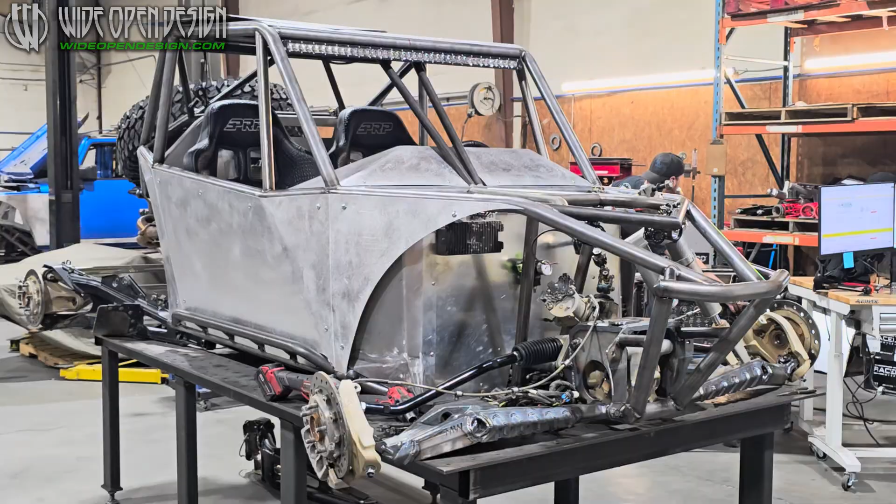There's more rock crawling. That right there is why Jason has poured the last 8 weekends of his life into this car to get ready to compete at the highest level of rock racing. Let's check out where he's at, let's see where he's headed. There's some really cool stuff going on today, so let's get to it.

Getting the front upper A arms done. Me and Adam had a discussion - these were supposed to have bushings on the end of them, and we felt like going to a Heim jointed setup to adjust camber and caster would be a great idea for this as a race car. So I redesigned the front part of the arm to accept the Heim joint out there in the end of it, and these are all getting rosette welded and double passed.

The ball joint cups, we redesigned these as well and made them thicker wall, just heavier duty, and they've already gotten double pass welded - it's got a real hot single pass, and then came back and did that trophy truck weave that everybody likes to see, and got it all burned in.

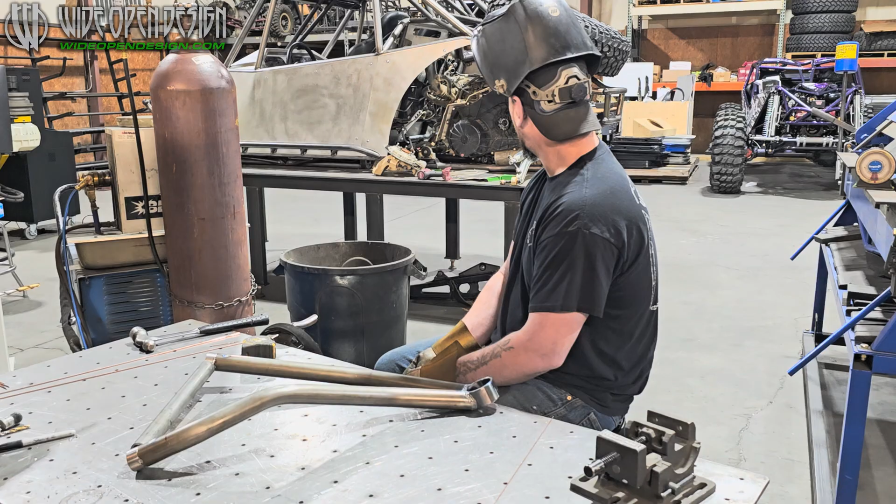I'll get this one finished up and burned, then I'm gonna jump on the plasma table and cut out all the rest of the front suspension mounting pieces, try to get those mocked up, throw the mock-up shock back in there, cycle the suspension, make sure everything's really good to go and kind of button that up. If we get through all that pretty quick today, we'll probably start working on the rear toolbox and stuff in the back of it.

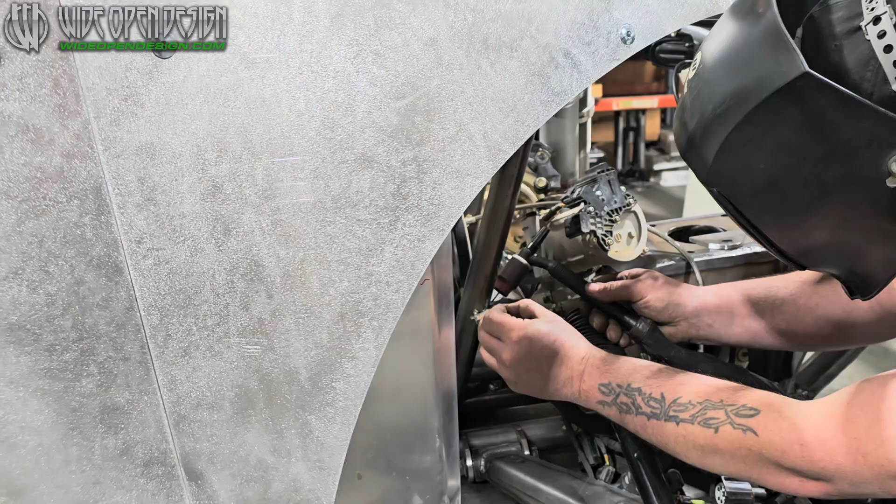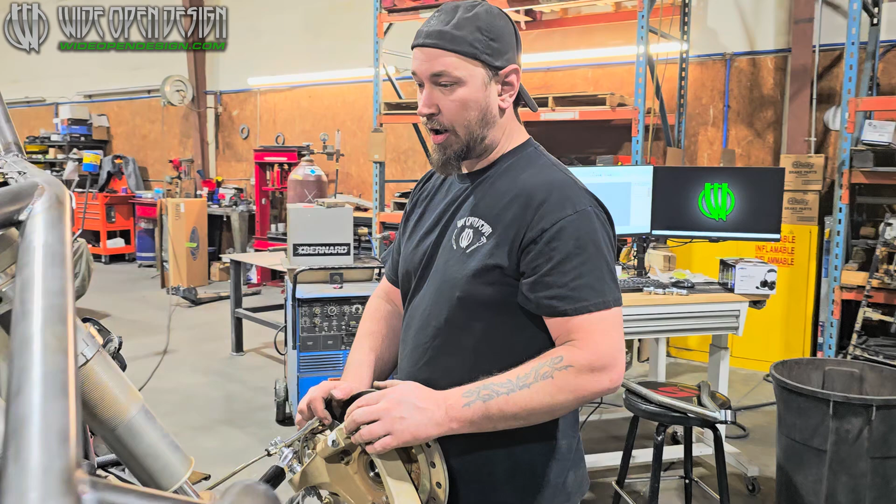This is all stuff we built. It's actually pretty unique because it's going to allow you to use any off-the-shelf turbo R parts. So anybody's suspension kit you want to run, whichever company you're a fan of, you can bolt all that stuff right back into the chassis.

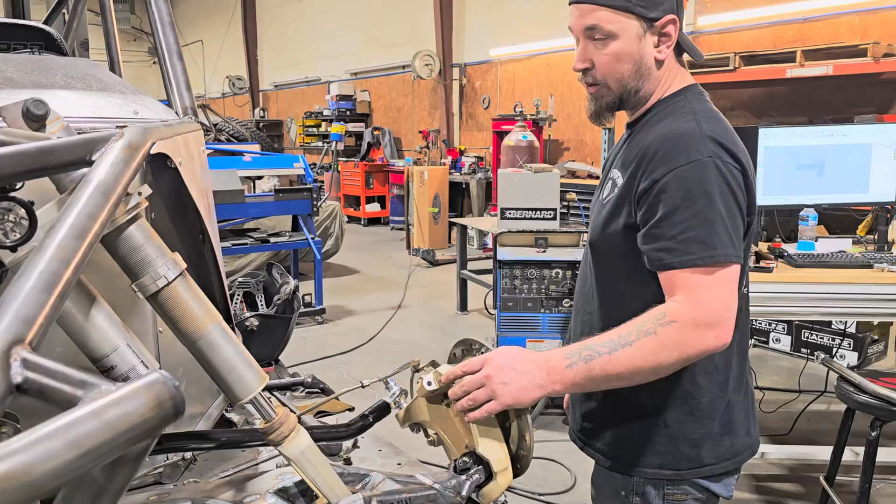RADFLO is building the replacement shocks for this to be able to go to market to sell to even full body users and race guys alike, and it's going to be a much, much better shock package than what you're seeing in this.

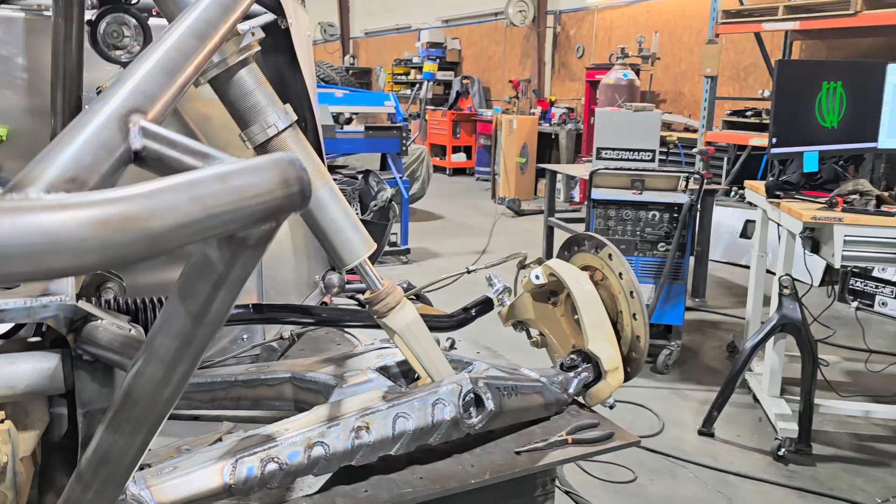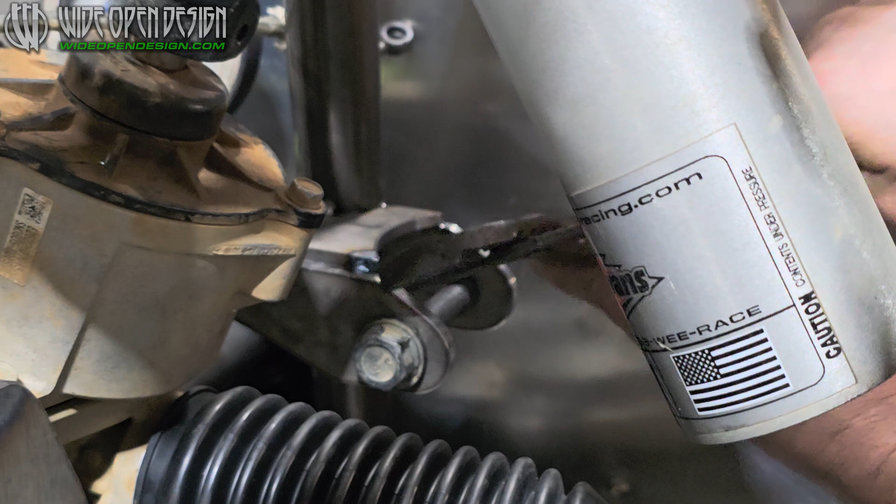Neat thing about a lot of this stuff is we spent a bunch of time CAD designing the whole car out to get it to where all this stuff could be cut with CNCs.

So you're tacking those in place and then adjusting them by just grabbing onto them and putting them where you want them. Yeah, I'm just making sure everything's nice and square, and I'm going to tack it all up, then I'll mock the actual arm in place and make sure everything still fits before it gets welded out. I want to make sure everything works and cycles and doesn't hit.

Like back in the day, you would have done all this with cardboard, cardboarding pieces out. I always look up to Shannon Campbell - what he gets done with cardboard is incredible. That guy just looks at things and figures them out.

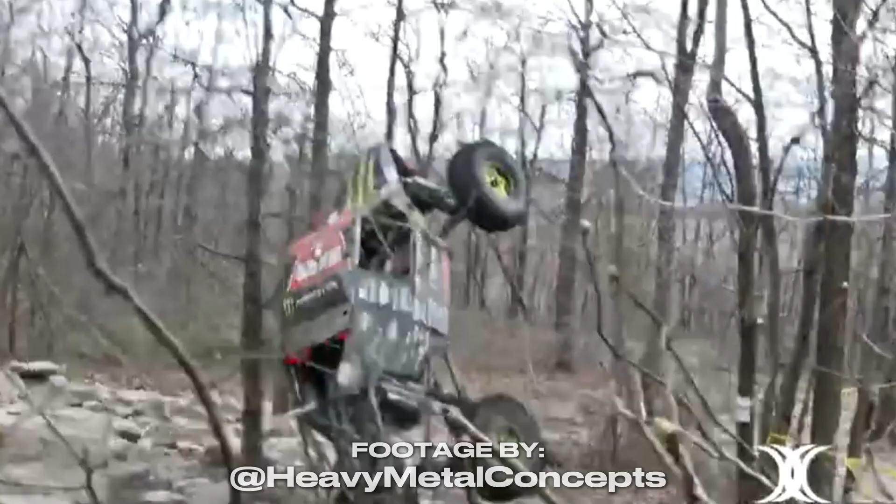The mix of that versus CAD designed parts - it would have taken 2 days to hand cut every one of these little pieces out for the front suspension and get them all cleaned up and fit in here. Instead, I spent a little bit of time on the computer and then walked over to the plasma table, and in less than an hour I've got every piece I need, and they all click and fit and go right where they need to go. It's that mixture of new school technology versus old school fabrication techniques that I think really just adds to the neatness of the car.

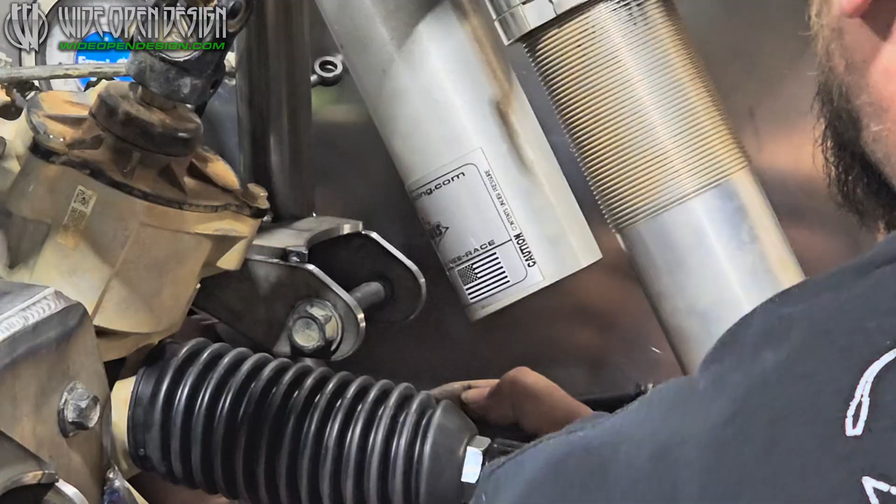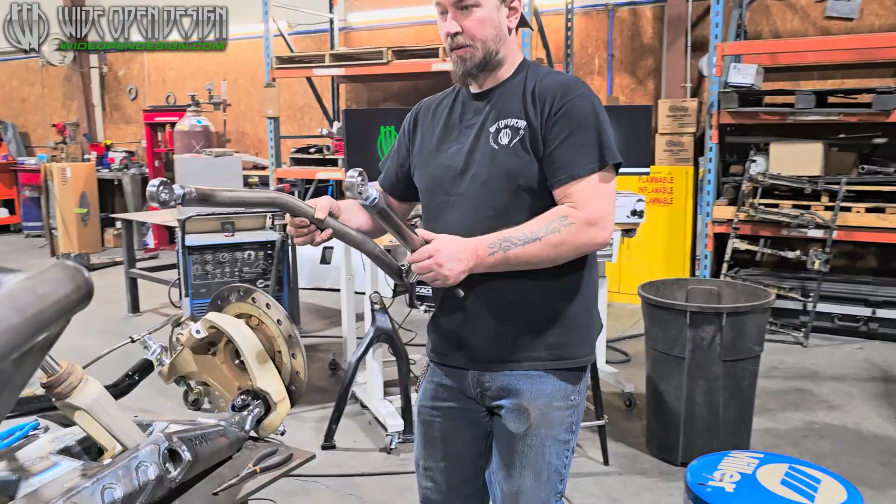Switching out, and we're not going to be using the custom bushings. We're going to have to make a couple misalignment spacers for this. I kind of know that going in, so for right now I just really want to see the arm in place. I'm going to be running RCV ball joints on this unit, which I'm really excited about.

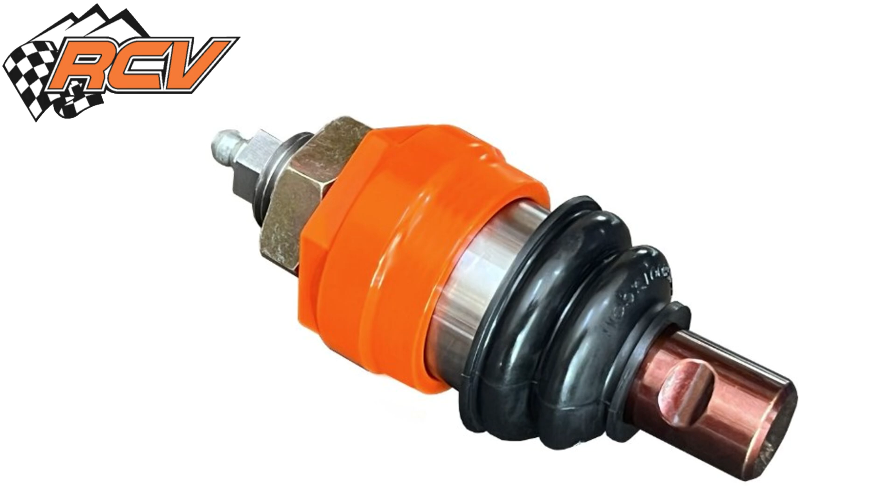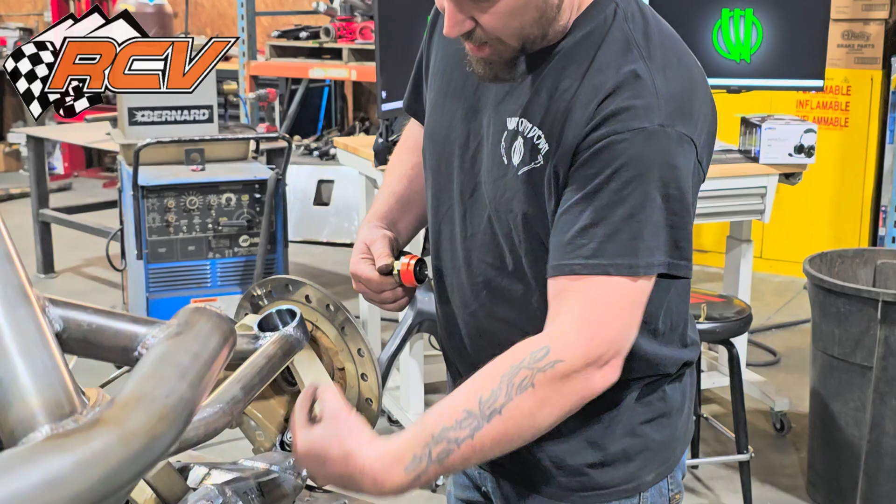Talked to Ricky quite a bit because they make these in 2 different styles. You can adjust preload in these, and then the lowers actually have a collar that you spin around, and it has 4 set screws that go in that are then retained by a snap ring. I think I've broken about every major manufacturer's brand of ball joint at this point.

I'm gonna have to clear this out. The welding process actually tightened that cup up a little bit.

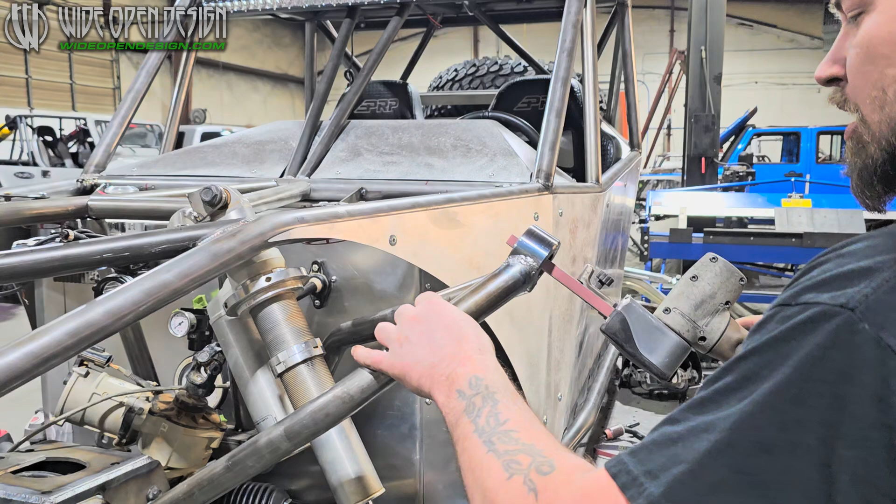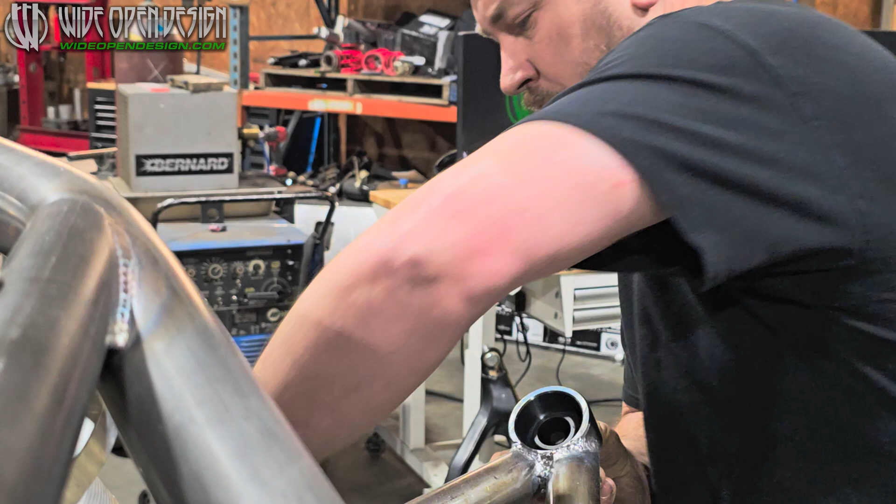Devin, our machinist, made these the other day, and he made them super tight fitting. They were machined to be a super tight fit, and then all the heat that I put in it welding this ball joint cup to the arm itself actually warped it just a little bit.

It's a good looking unit. A lot of good parts coming together on this car.

Both the heim joints are hidden, almost centered out real good right here. Once I get the misalignment spacers actually made, I'm gonna have to draw those up, and we'll probably run them out of our CNC machine.

I can actually get that squared up and call it done, but I can tell you everything looks good. Moving forward, I'm gonna come back in here, and I'm gonna end up putting a tube to brace this out right here. Might even plate the top of that in.

We're talking about trying to package an air bump out here. I'm waiting to hear back from RADFLO on whether they feel like the car is going to need it or not. Is that 188 wall? That's 120 wall. Strength wise, I feel like we're going to be all right, and it's on video now, so when I'm wrong, everybody will know it.

People have bungs get ripped out of tubes all the time, or they rip the ball joint cup actually off the A-arm. So I went back and I double pass welded all the ball joint cup in, and we increased the surface area on it.

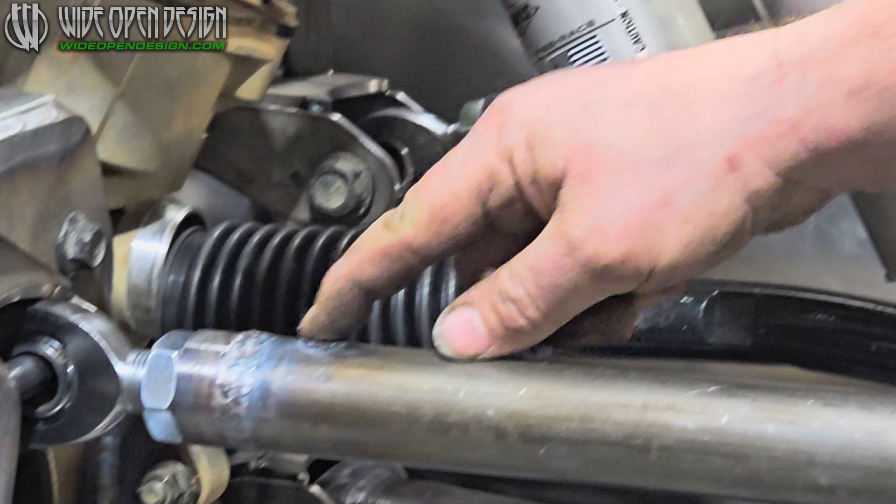And then I actually put a rosette weld in these bungs right here, so it has a rosette weld holding it in, and then that was actually triple passed. It had a fusion pass, a fill pass, and then a cover pass with that trophy truck weave look to it. So it should hold up.

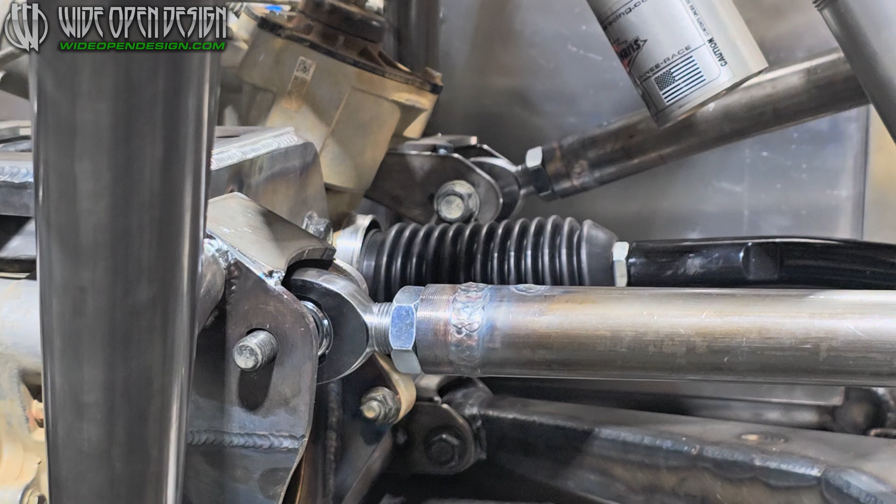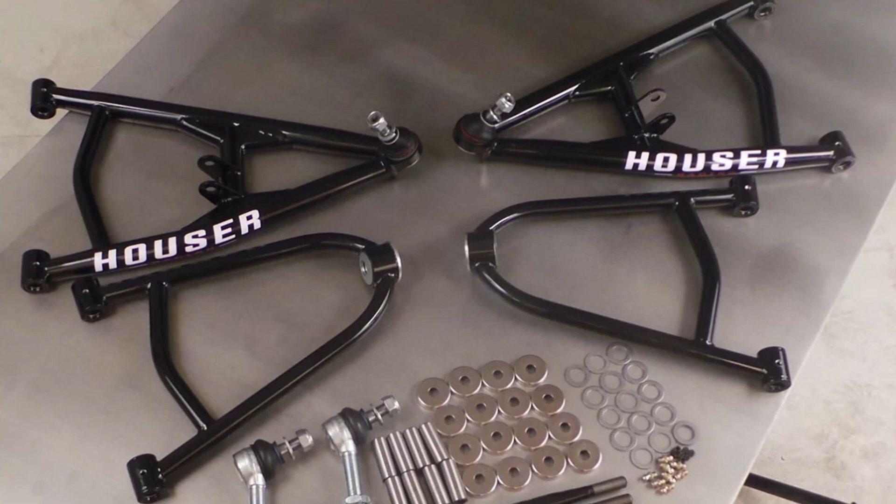I just had a wicked idea that I remember from back in the day. Houser Racing made these arms, they called them the silly cast. I think they might still make them, I don't know, I've been out of ATV racing for a long time, but they used a rod end, and then they used different spacers at the A-arm mount up in the top to adjust caster.

I think when we design the misalignment spacers for this, I'm going to make them narrow enough to where you could put spacers in between here and actually shift the arm forward and backward, and you can see what it's doing to the caster of the car. It's rolling the caster forward and backward while the arm's moving forward and backward.

And then I can use the rod ends that are in here to adjust camber, and that's going to give us the ability to set it up for desert. We can set it up for short course. We can set it up for woods racing.

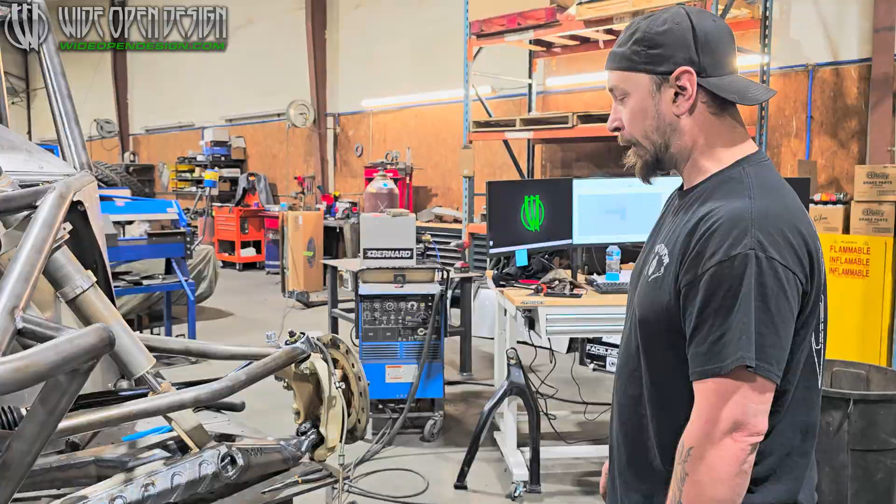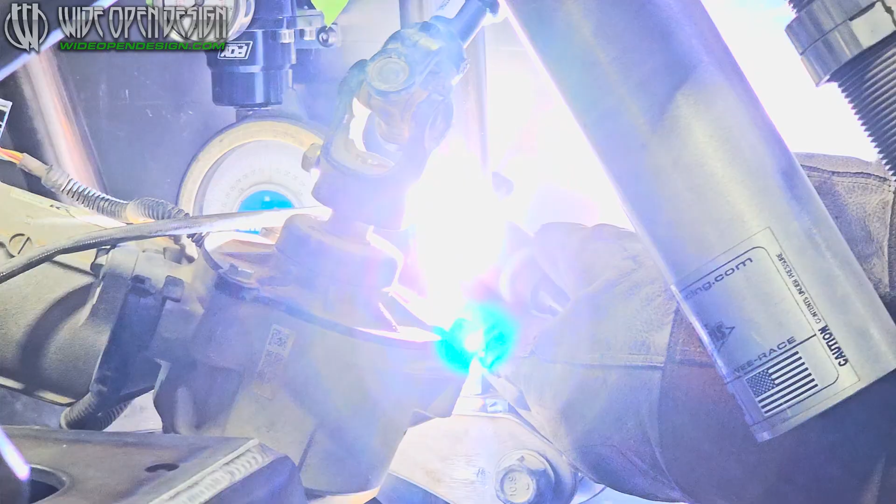Help spread load on that upper mount back there. Take a big hit like this way, it helps keep all that from trying to wad up.

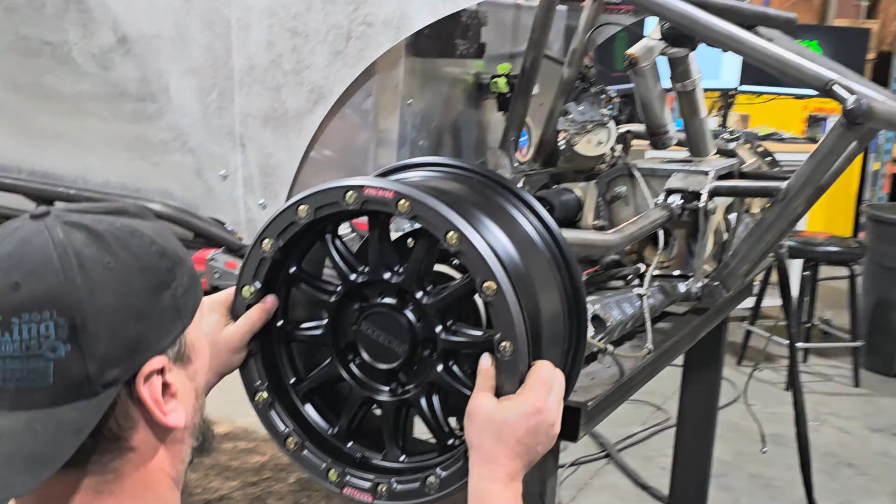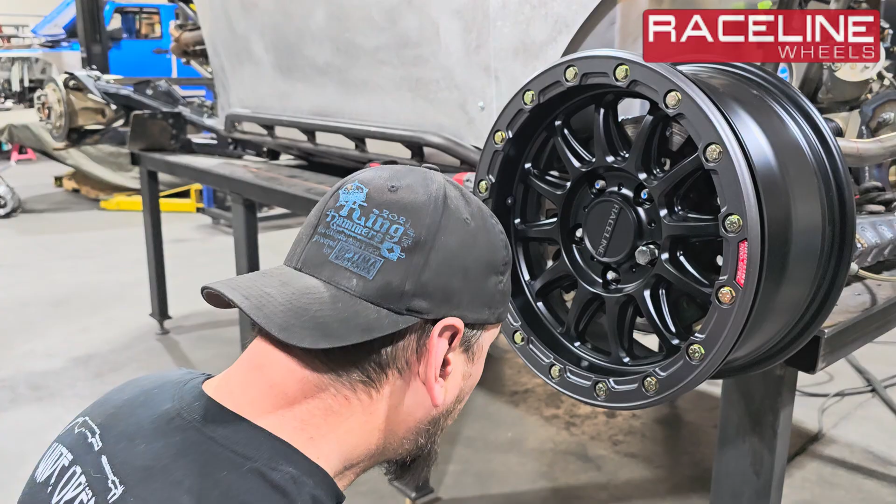Racelines are going sweet on there. We're leaving here in like 2 weeks, and you're behind the machine. What are you working on right now?

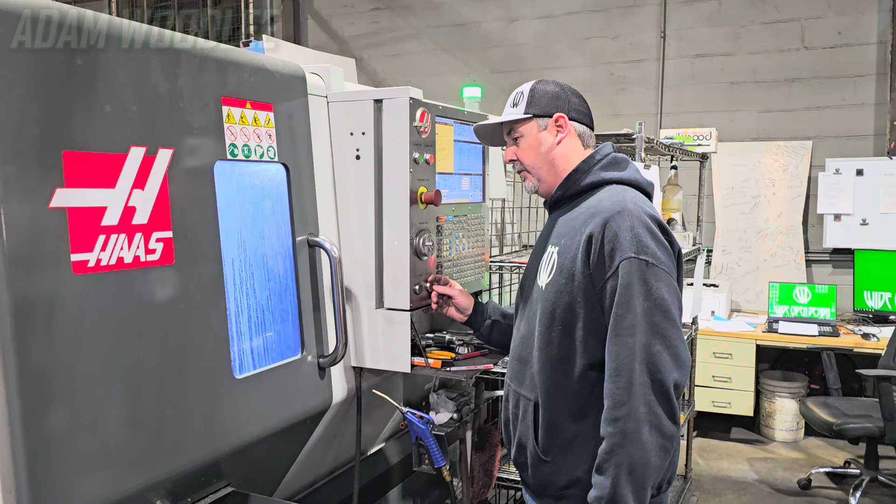Well, where Jason was talking about running those spacers in the front, we added a rod in there with no misalignment, so the chassis tab width's different than what it should be. So what we're doing is just whipping out a custom machine spacer that takes up that difference he was talking about. So I drew this spacer, just got the profile.

See this? So that fits right in there. And then we're actually going to machine another wide spacer that's about 3/4 of an inch wide, then an 1/8 inch wide spacer. That way, whenever we're moving this in the tab, we can set the caster of the vehicle, move the A-arm wherever we need to be.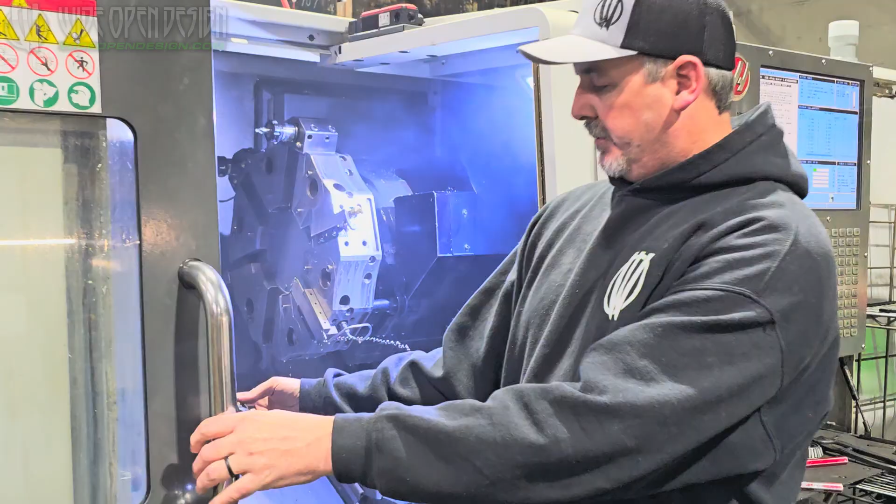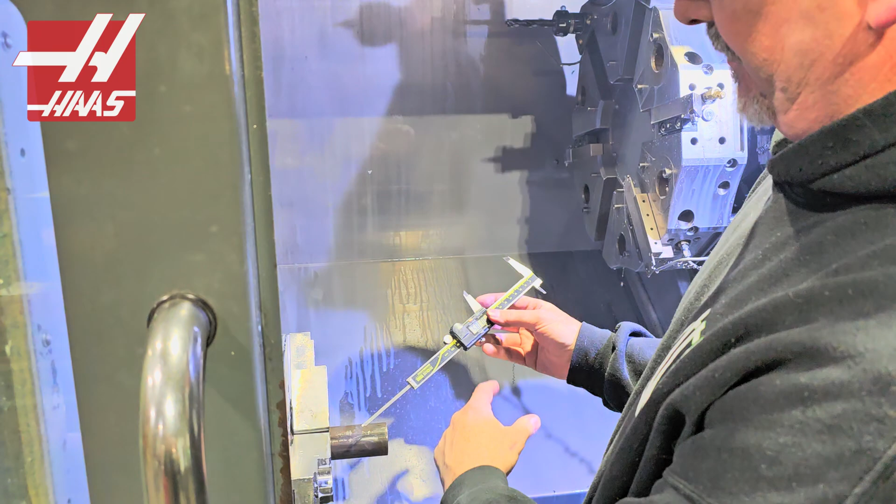Most of the time whenever I would do this, I'd set it up on a bar puller. This is just a quick op for us. I just kind of set my material in here by eyeballing with the calipers. I've got it locked down. It doesn't have to be real even because it's going to come in and face that material off anyways. So hit go, it does a tool change, and goes right to work.

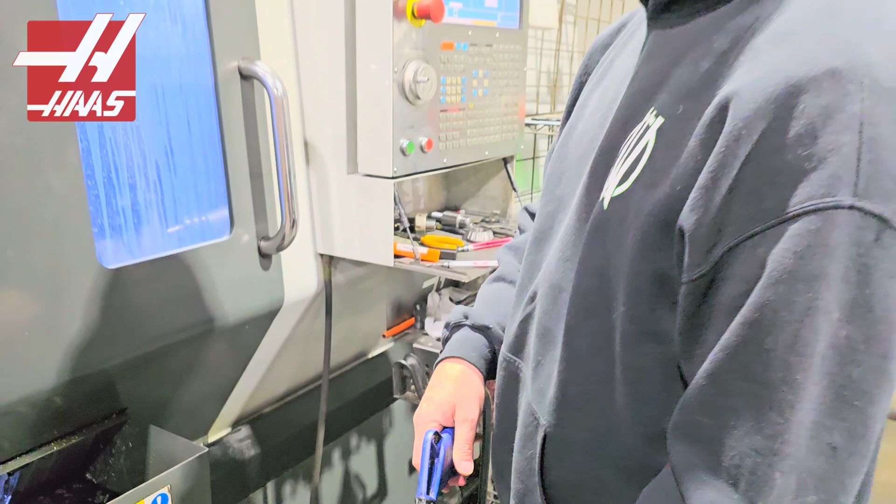Wait, so it pops the part out right here? Absolutely, when we're done. I did not even know that, I thought that was just a waste bucket. No, that's called a parts catcher.

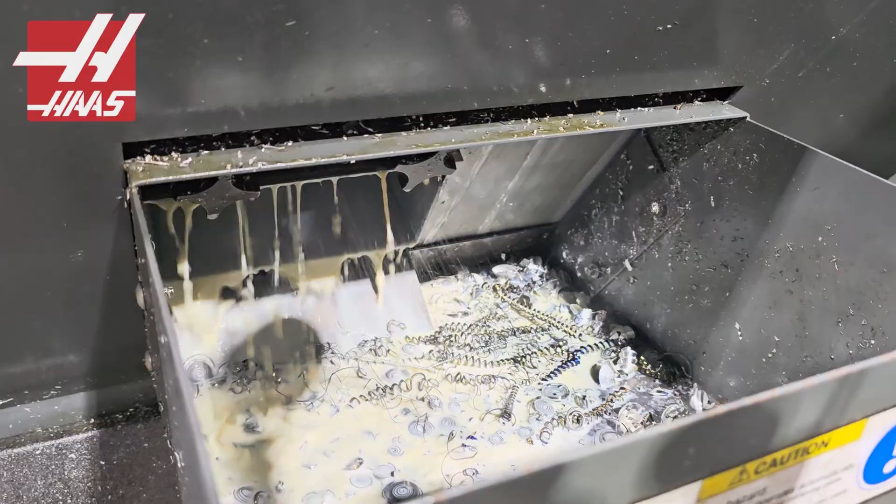No way. What? No way. So yeah, we get these all machined up. We'll go back to the car and check out what we're talking about with that adjustability.

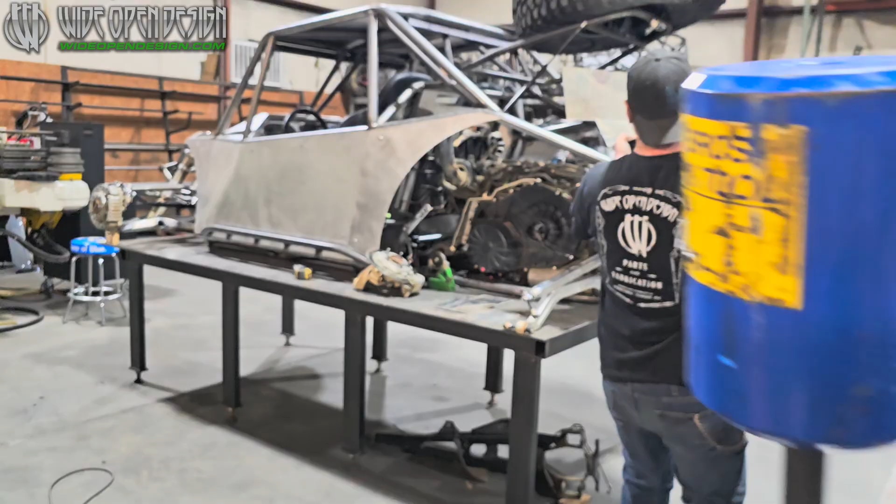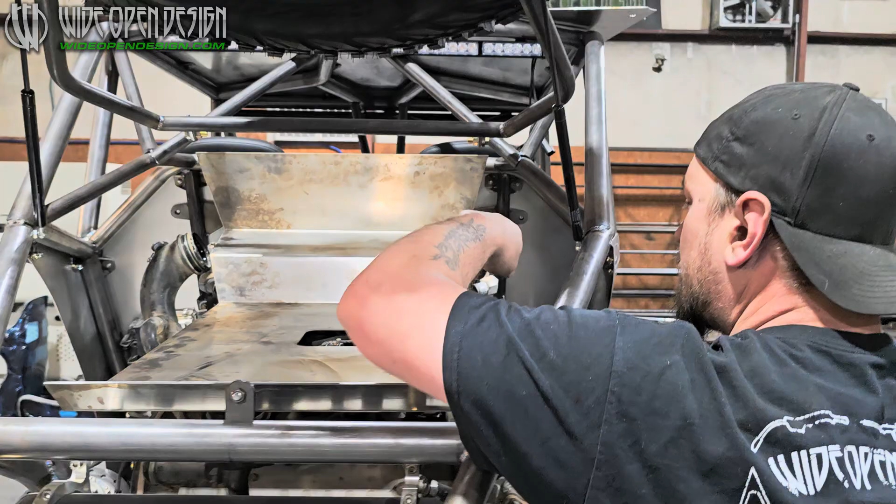Left a little access panel right there where you can actually change spark plugs and coils out without taking the box out. I wonder how you learned that. Yeah. I can tell you where we do have a problem is they've changed this over the years because this used to just plug in up here.

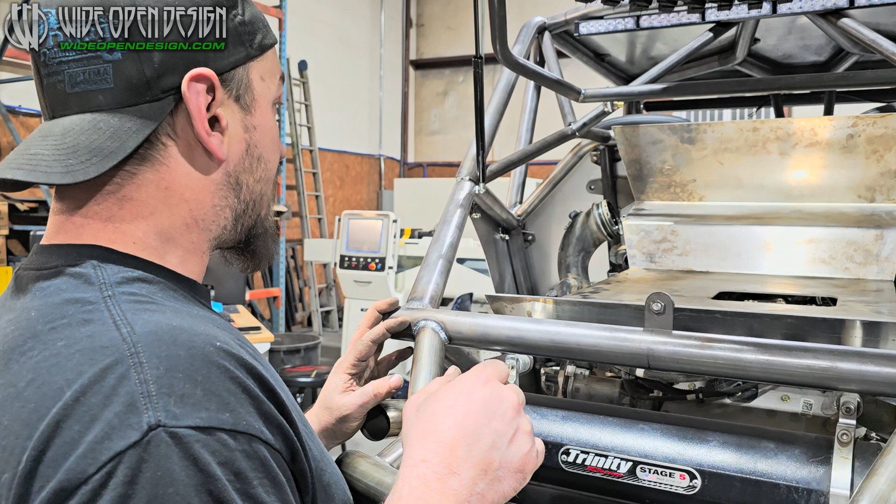So I'm going to have to order a couple elbows and either some stainless or some aluminum tubing and build a new intake piece that runs up around there. More money. More money. More aluminum money, intake, cooler sounds. Let's figure out how we can throw more money at this project.

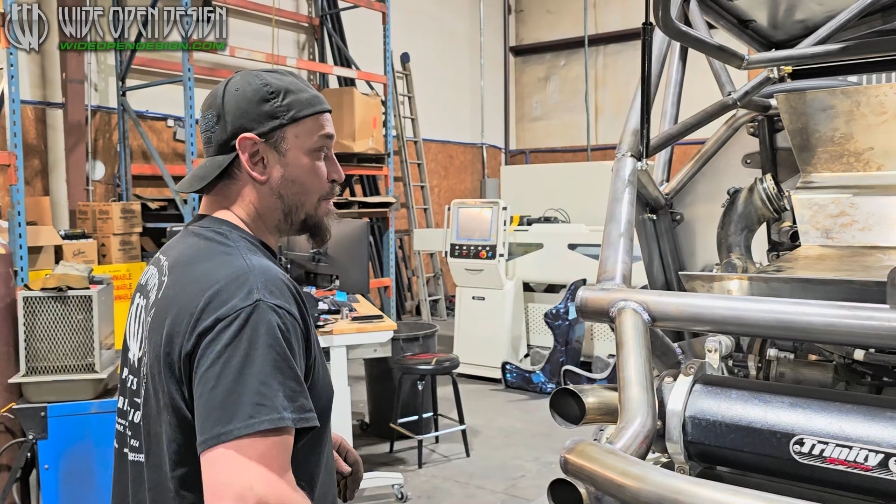That just happened right there. See that right there? More money. Seems to be the theme here.

Actually fits pretty good though. Throw a couple mount brackets back here to hold it and a mount bracket up here to hold it. Don't suggest anything to Jason because he's probably already thought of it. And what do you probably already think of? That is absolutely not what you need to do. When you have an idea or a suggestion, you need to come forth with it.

Come over here and check this out, Hunter. I'm going to show you a little something about how cool your idea is and tell me that you're actually on the right page with where you're going with your thoughts right now. So there's the tire carrier in the down position and the lid in the closed position, and if you click that, you'll see that the spare tire comes up and the lid comes up with the spare tire. It's pretty. That's clean. Pretty sick.

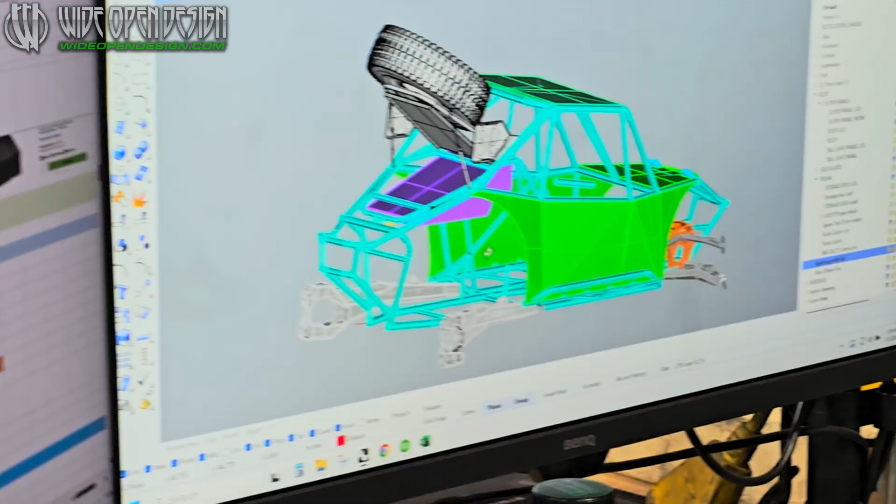Yeah, in CAD, that is a 37-inch tall tire. Makes it look small. It messes with you depending on what you got around it to give it perspective, but yeah.

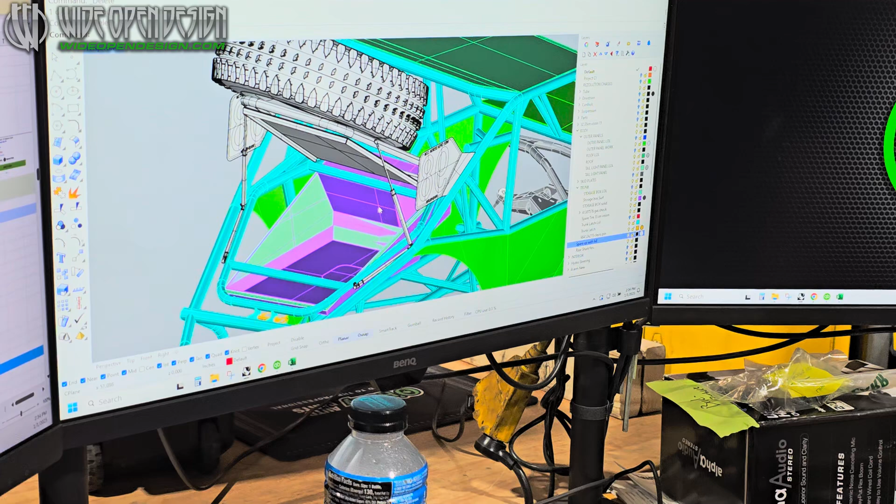So let's actually look at it. This toolbox consists of the bottom piece you just did, side pieces welded to it, obviously a back piece. If we delete this, you can see the inside where the air box is actually mounted up in the front right there, and the air filter rides in that part of the housing right there.

And then there's a lid right here that comes out, and this is so you have access to your spark plugs and coil packs in case you need to get in there quick. You don't have to remove the entire unit to get it out to access these. It'll be 6 bolts right here around this in a circle.

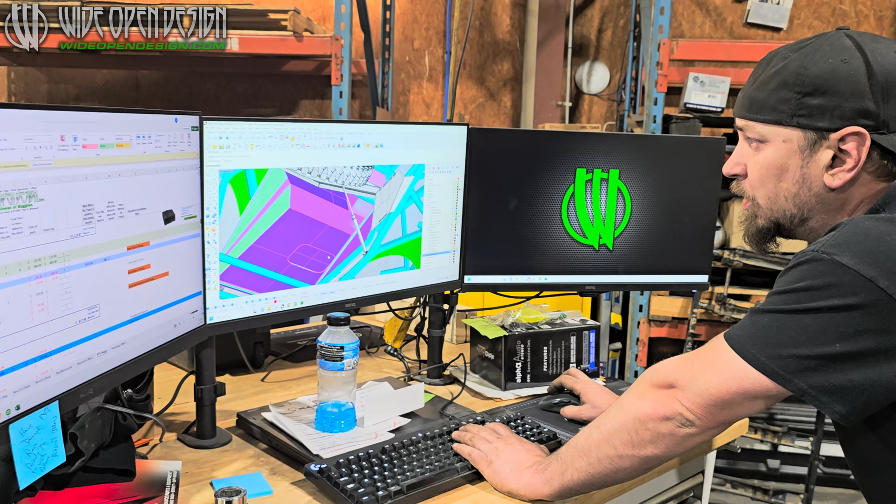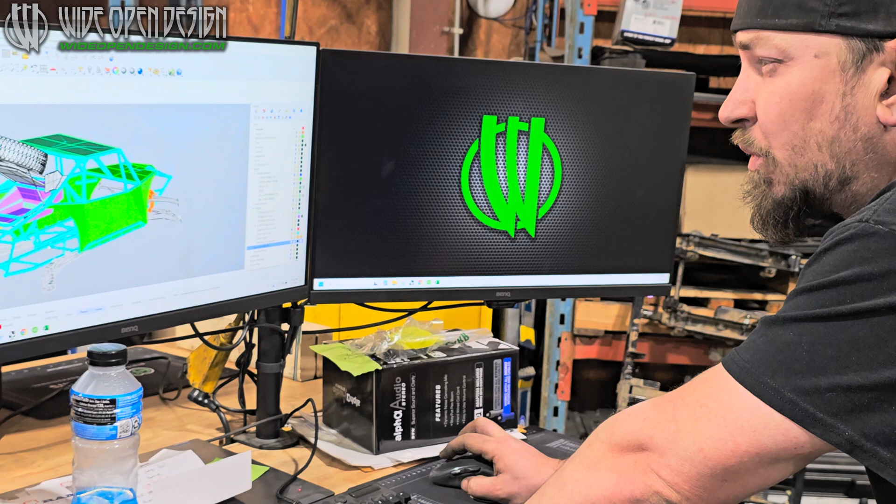And it's long enough to have spare space in here to where the RCV spares will be run right in here, that I highly doubt I'm gonna have to get out and actually use. That's awesome, plenty of room in here for tool bags and... When you engineered it like that, you wanted to carry some spare axle shafts, but you know the regular off-road guy is going to want to carry spare shafts, so that's kind of the thought process there.

Up here in the top, there's a piece not shown here that I've done on the last 2 or 3 of these I've built. I bend up a little piece of 125 that's really close to the thickness of the belt, and then you can stick a belt right in there and it hangs out the top of the spare tire lid.

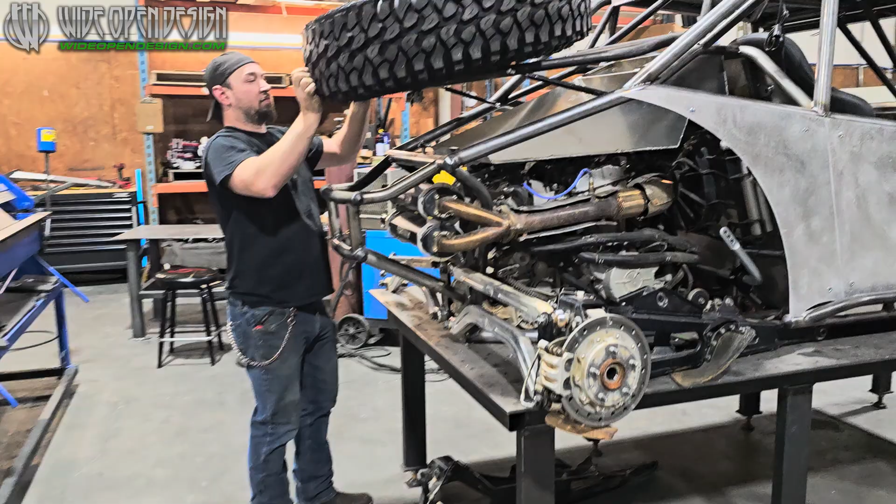What you got? Fine, I got a hoodie pocket full of stuff. Hoodie pocket full.

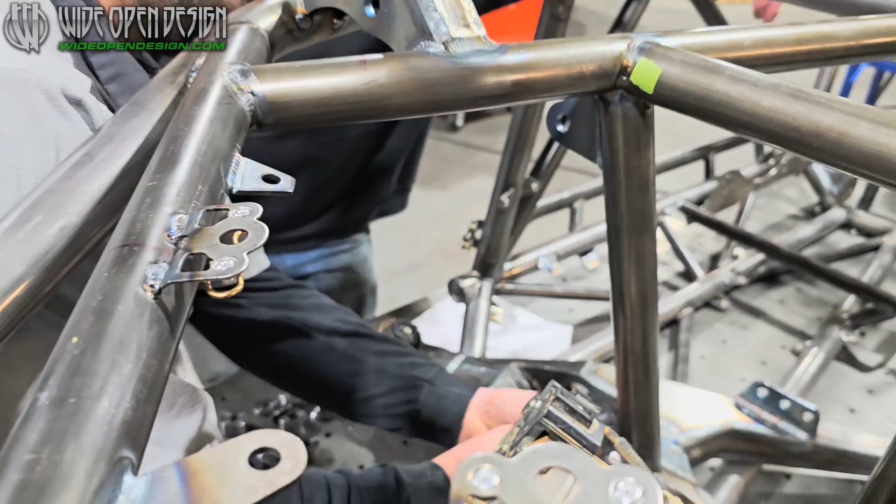Cool. Yeah, we do need that other spacer, right? You can't go to centered now without it. I can't go to centered without the other 1/2 inch one, but if you had a 1/2 inch one, you'd run a 1/2 inch with a combination of 2 1/8 inch spacers, and that would give you the full spectrum.

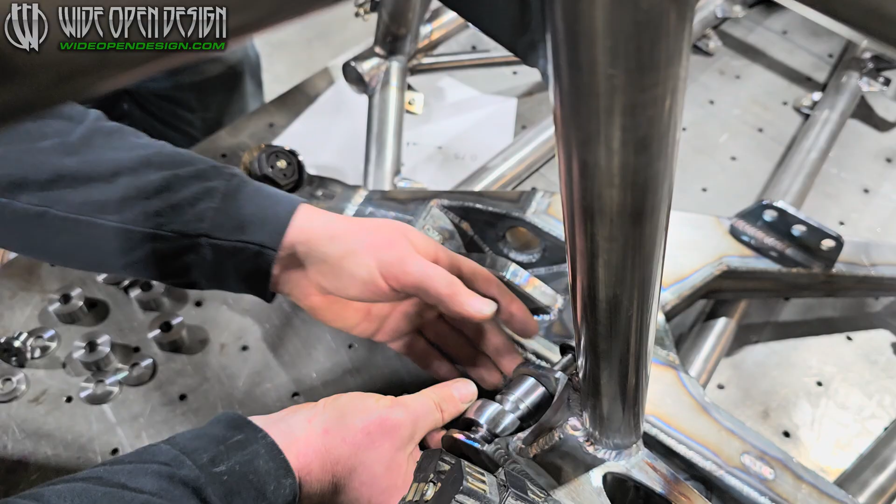You don't have enough 8ths. You need 16 3/8 spacers, not 8, you need 16. 2, 4, 6, 8 - no, just the uppers. Just the uppers. The lowers ride on a bushing, you just need 2, 4, 6, 8. Yeah, it's just 8. That's the deal with them.

You can throw away - actually, those I hang on to because we still have more adjustability using these with those combos. Gotcha, alright. This will give us the spacer in here. Then you can go anywhere in the spectrum in 1/8 inch increments. Yes.

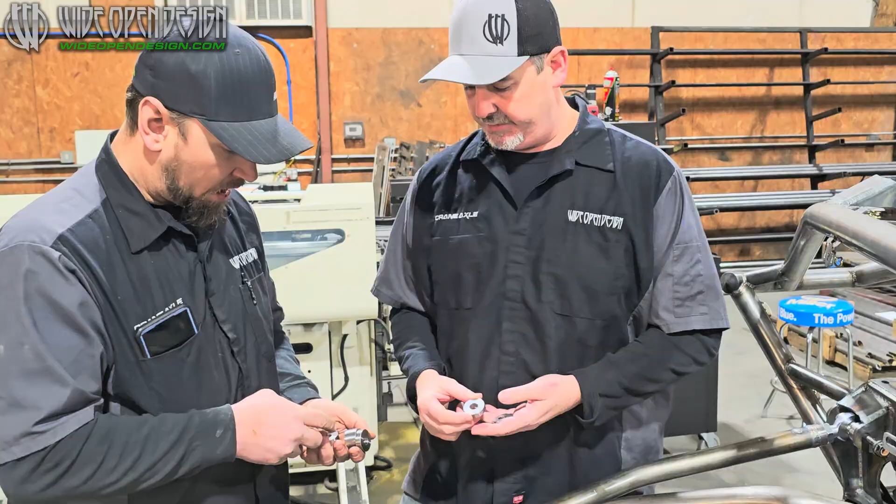Alright, so we've got these spacers now. This is going to let us stack that thing in there like what you had in mind, right? Yeah, I feel like with the thick one, the medium, and the small, now we have infinite adjustability of how far we want to go. Either way, we can get all of it.

Absolutely. So if everything's right, those should slide right in - that 3/8 and that 1/8 inch spacer in there, that dude, and that dude. So now we've got it to where if we want to move this A-arm, we just move these shims around in whatever little game we want to play with it.

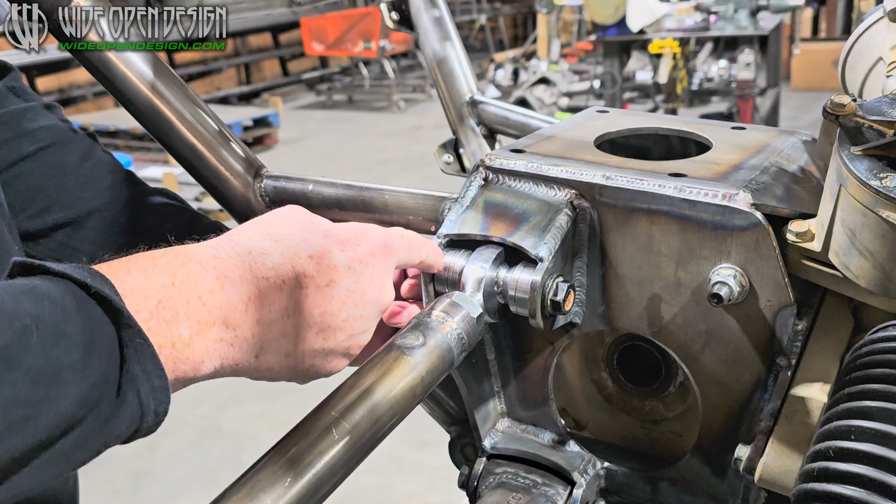And then also with the tab width, even if this isn't right, we can still come back and build anything that's infinitely adjustable. Yeah, we can keep building. And you still have a little bit of adjustability left in the rod end too. So you can use these to do the rough tune, and then we can clock this one in, pull it back a little, push it forward a little to get the caster dialed in. I love that idea.

Also, I didn't even think about it, but Kevin's front A-arm on his car has got a little tweak in it, it's trying to rub the bypass tube. He runs out of this adjustability all the time. I never thought about it - if you bend an arm at the track, you don't have another arm to put on it. We can adjust it back and go to a new arm when we get home.

Yeah, if I smack this into a rock even during the race, it wouldn't be too hard to throw my jack underneath it to support the weight, and I could swap the spacers. If I crush this and it's getting into the shock, I could stop and switch this. You really could. I mean, 5 minutes to save the race would be worth it at King of the Hammers - maybe not in a woods race, but finishing is finishing. That's pretty awesome. Alright, that's got that knocked out.